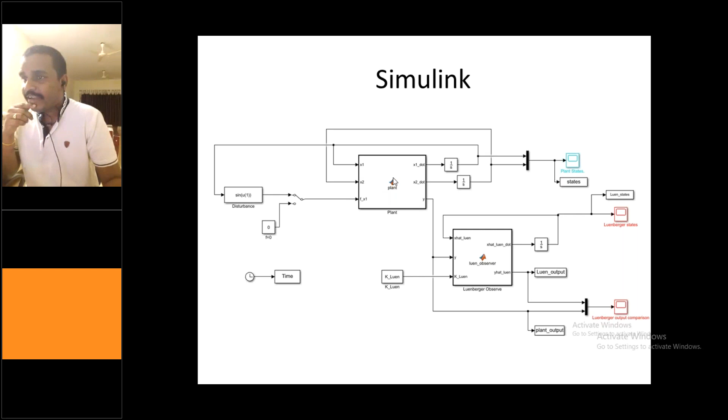So this is the Simulink diagram. You can see that this is the plant, and the plant has two states, phi and phi dot, and these are the derivatives, phi dot and phi double dot. If I integrate them, I'll be getting phi, which is x1, and integrating x2 dot, I'll be getting x2. This has gone inside the plant, and there is this tiny switch here.

As we have seen, if I double click this switch, either 0 will be activated, or this disturbance will get activated, the unknown uncertainty we can say. So here I am going to see my output, how all the states go, and here the y, which is c into x, is going to the observer. You can see here that not all states go into the observer. In this particular case, we have assumed that my output is a combination of the states.

Just for artificially, I assume that it is a combination of states. However, one can always assume that only one of the states, like x1 or x2, is available. So my C matrix either becomes 1 0 or 0 1. If both states are not a linear combination, and if my outputs and states are the same, then my C matrix will be the 2 by 2 identity matrix.

Now, what's going to happen is, with the x dot equations we have seen, if I integrate that, I will be getting x hat dot, which gives me x hat. Along with this Luenberger observer gain, I can see what is happening to the outputs, and similarly I can see what is happening with the estimated states and so on.

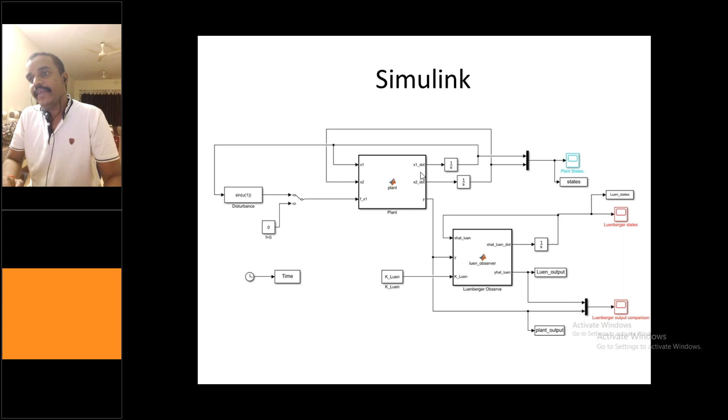So C is this one, and y equal to C into x1, x2. So the output arguments here are x1 dot and x2 dot. Since I'm getting x1 dot and x2 dot, if you integrate these, you will be getting the states, and the output as well is one of the output arguments. So the inputs are x1, x2, and fx1, whereas the outputs of this particular block are x1 dot, x2 dot, and the actual output of the plant, y.

So this is the Luenberger observer structure, this is the Luenberger observer code. For the Luenberger observer, you see x hat dot equal to A into x hat plus B into u plus H into (y minus y hat), and y equal to Cx. So A matrix and C matrix are required here.

Since this u is 0, we are not considering this term, so it becomes 0 because we are not considering the combined state estimation and control problem. Y hat equal to Cx, as we've seen, I have written it like this, and for y hat I have selected C into x_Luen.

So what I'm doing here is x_hat_luen_dot equals A into x_luen. You can see that it depends on how you are selecting this. In this particular case, instead of y minus y hat, what I selected is y hat minus y, so that's why the negative sign is coming into the picture, because I have changed both terms. I kept it this way because while comparing with the Luenberger structure, I want to retain the similar structure of the observer. So this is more or less the same, only thing is this y minus y hat I replaced with y hat minus y, so the plus has become the minus here. So that is the Luenberger observer.

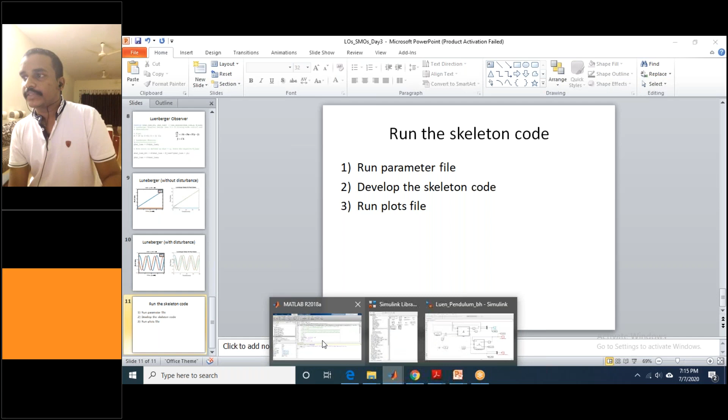I will quickly show you the simulations, how it will look like and what needs to be done. As I told, the first thing is the Luenberger parameters I am going to give you. I'll be giving you this one, so for the Luenberger parameter, you don't have to work on anything. Just if you run it, you will be getting this A value, C value, desired poles. Let me clear all - I have not cleared all. So A, C matrix, desired poles, and this is the Luenberger observer.

The first step is you have to run this one. The second step is I have given you this file, so this is the file which will look like - but inside this plant and Luenberger, it will be the same thing we have seen. You have to copy and paste it. If I run this one, here you can see the switch is there. The first case you run with 0 disturbance, and if I'm running this, hopefully it will run. Yeah, it is running fine. If you write the code inside these two blocks correctly, then that should be fine.

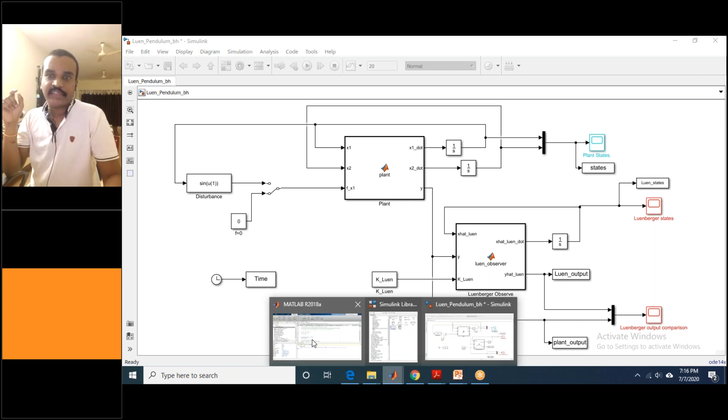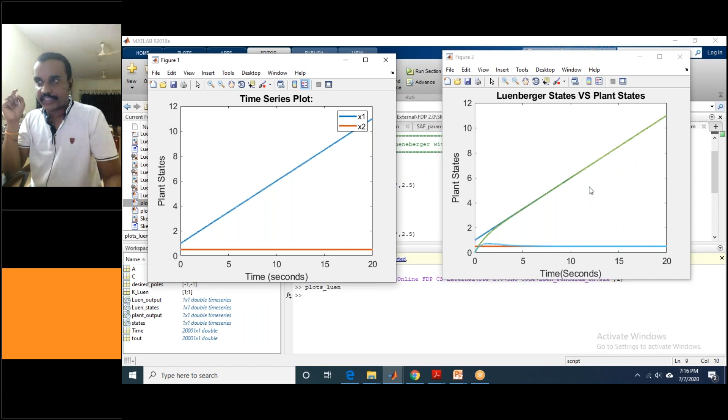And once you run this one, this plot file also I have given. If you run this plot file, you could get the two results - you can see the two graphs. So this is only the states, and this is the states versus observed states. And as we have seen, it is perfectly fine. So in the second case, what you have to do here is see the performance of the Luenberger observer in presence of uncertain terms or faults.

So this is the disturbance. What I'm going to do here is activate it by double clicking this one. Again, I will run this one, and then I will go to the plots. And again, if I run this one, then you can see.

Since my graphics card is not good in this particular personal computer, that's why it is taking much time to see this one.

So the left one, you can see, is only the plant states. And when I overlap the plant states and the Luenberger observer states in presence of disturbances, you can see that

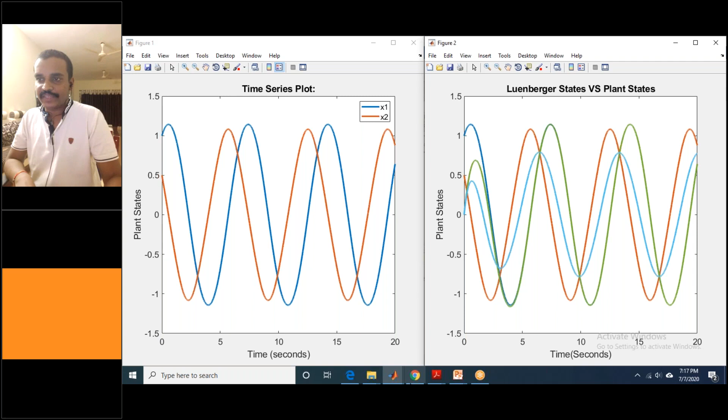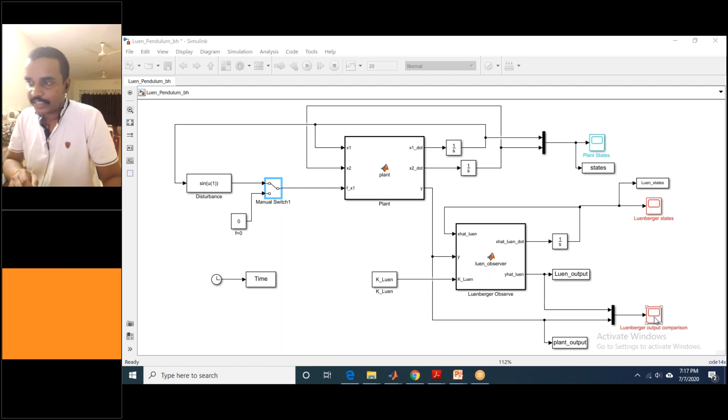it couldn't do the performance very well. I don't know if I have plotted the outputs as well. No, output I have removed. The output you can see from here. This is the Luenberger output comparison, the plant output and the observer output.

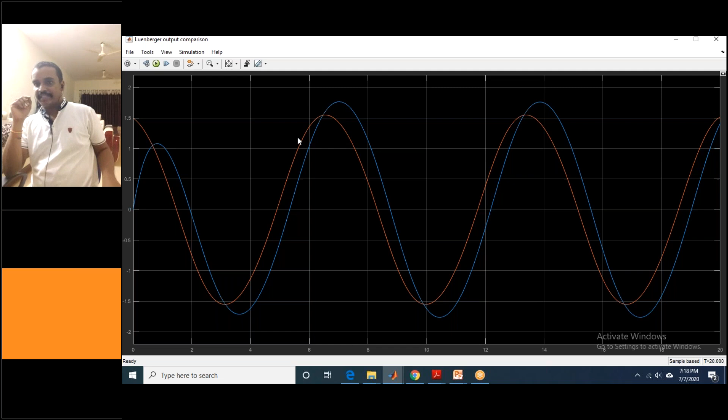You can see that the plant output and the observer output are not the same. Just to inform you, there is only one output, y equal to c into x, where c is the linear combination of the states. So x1 plus x2. You can see that one is the plant and then another one is the estimator, and

they are not at all matching. This I want it to match even in the presence of the uncertainty. So this aspect we will see.

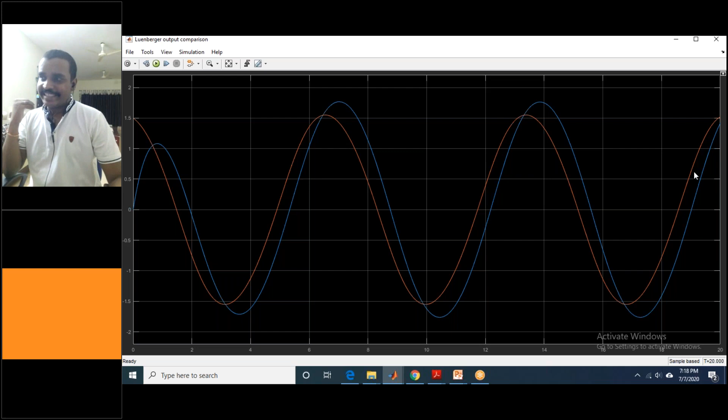So this is the limitation, why one has to go for the sliding mode observer, because in the naive form, this Luenberger observer cannot be able to handle the external disturbance terms. So we will be going to discuss the sliding mode observer next.

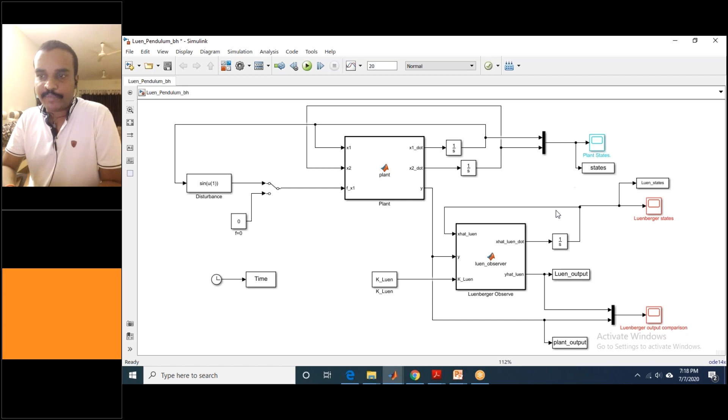I will be sending you the PDF file, the simulation file, the skeleton of this file, and plot file and the parameter file. So you have to follow this particular setup. You have to run the parameter file which is given to you. The only thing is in the skeleton code you have to change the plant as well as the controller, and then run it. Two cases: one without disturbance, the second one with disturbance.

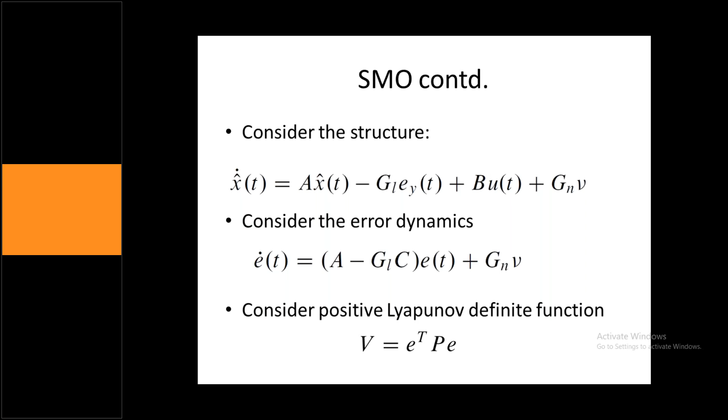So for the sliding mode observer, we should know the bounds. Though here we haven't represented any fault, we can see from the earlier discussion that you can consider this as a disturbance factor, and the bounds of this disturbance should also be known to us, as in the earlier cases.

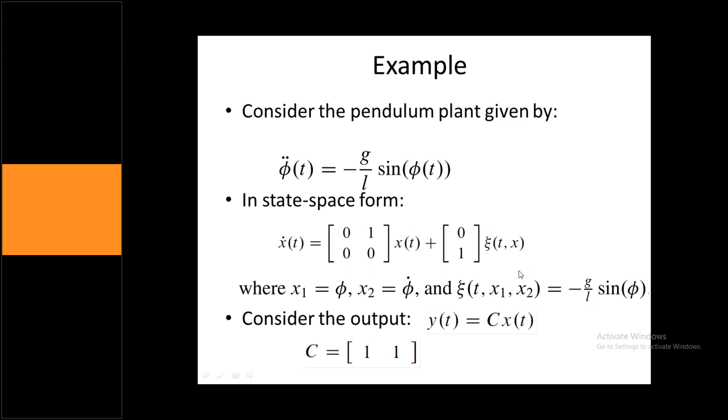So the bounds we have seen in the sliding mode control play a crucial role. So the bound should be the maximum, and the bounded value should be known ahead, a priori.

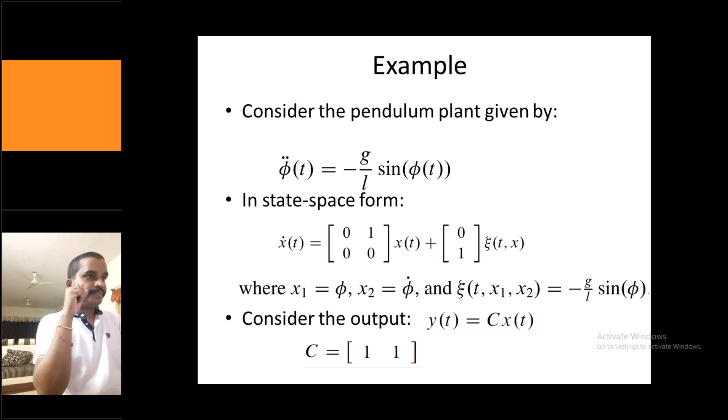So again, I'm coming back. This is the structure of sliding mode control, a sliding mode observer which has been taken, and we have to take the error dynamics.

Error dynamics, again, we have seen x minus x hat is the error, or in this particular case it is x hat minus x. So the error dynamics is x hat dot minus x dot. So x hat dot you can get it from here.

You can see that, whereas the x dot you can get it from the equation we discussed earlier. And if I substitute and rearrange, then it will look like this: A minus GL into C, where this e is x hat minus x.

So it is obvious, so first let me explain what is happening. If you see, this is x hat and the x is coming from there. If I'm subtracting this, x hat minus x, then taking A common, you can represent it in this particular form. This is quite straightforward, and this EY I have written somewhere.

I will show you later what this EY is. EY is the output error, which is nothing but C into x hat minus y. So that is the output error, the error between your observer output and the plant output.

And there is another term, this bu, you will get because we assume that the control is not the problem, not our main concern. However, in this particular case, this bu, because we are considering the error, x hat minus x...

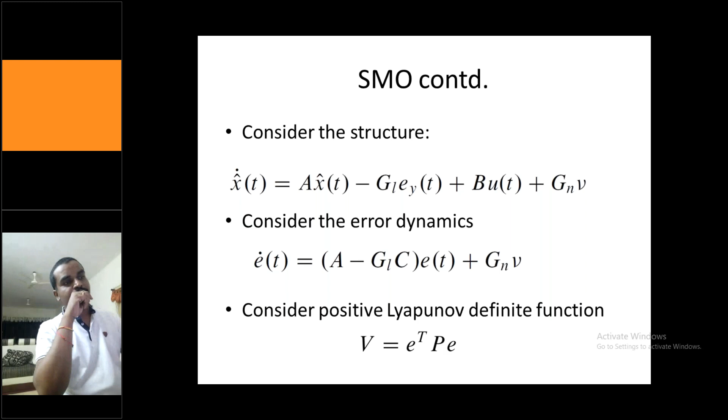If you select P as positive definite, then obviously your V will also be positive definite, because this E transpose E, in the scalar case it will go to square, or if it is a matrix, then the square error terms will come as diagonal elements.

And if you take the first derivative and substitute the error expression from earlier, you can see it is in this particular form we are getting. So now, to ensure that the first derivative is negative definite...

...we have to select P, GL, and GN in a suitable way so that this above expression should be negative. Then we can say that the error in the error system is stable, so the error dynamics is stable.

Question mark: what kind of stability? Is it asymptotically stable, or quadratically stable, or finite time stable, and so on? That needs to be thought of. For a very naive case, we will assume that if this V dot is negative, the error dynamics of my system is stable.

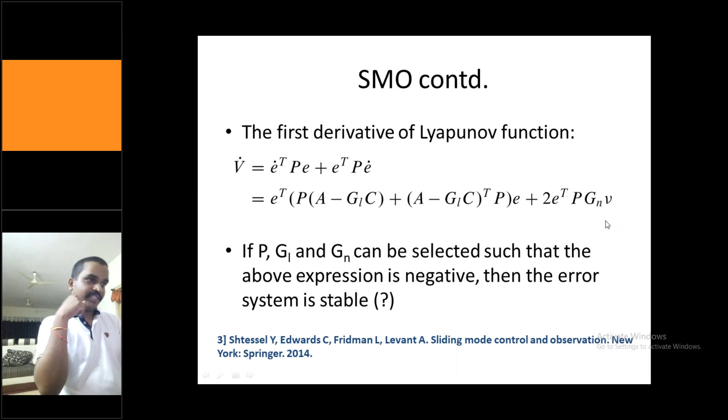So the key thing is, how do I select this one? This A minus GLC you can select from the standard pole placement, what we have seen earlier. However, the selection of GN and v is the critical one which needs to be thought of.

So now we will design the sliding mode controller, sliding mode observer for our plant. You can see that this is the structure, the same structure.

What we have seen, this error, you can see that this is C into x hat minus y. So that's what we have seen. The linear part is GL. It can be selected from pole placement, and we'll keep it the same.

The same pole placement design what we have selected, the desired poles are -1, -1. It is not +1, sorry, there is a typo here. So again, we will select the same desired poles -1 and -1, and we will see whether it is able to deal with the plant or not.

This is the Luenberger gains, the same. We will be selecting 1, 1. And the non-linear part, we have selected something like this. How they have selected, this is the problem of our interest. This we will discuss maybe tomorrow. I just give you a brief introduction about the selection of this one.

So if you see overall this one, this sliding mode observer is kind of a retrofitted model. One can retrofit in the Luenberger observer model. You can always assume that in the absence of disturbance, you just activate the linear part, which will do the task very well. As soon as you see the disturbance or there is a mismatch from the nominal plant in the actual plant, then you should activate the non-linear term to handle that. That is the basic philosophy of the sliding mode observer.

In the nominal case, if you make this GN as 0, or the nonlinear term as 0, this particular sliding mode observer will boil down to the Luenberger observer, and it will work. It will be the same in the absence of disturbance, both will be the same. We will see that as well. And if there is a disturbance, this needs to be activated.

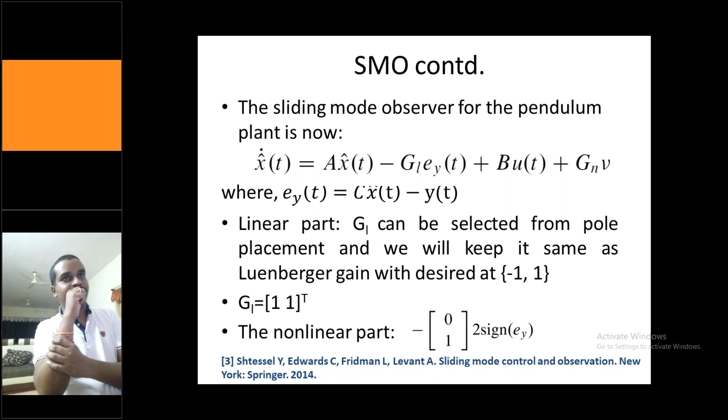So this sliding mode, this nonlinear part can be activated for real systems. It is something like that only. Because this nonlinear, always you don't want this nonlinear or chattering for your system to see. So as soon as your system sees some mismatch between the nominal and the actual plant, then you should activate this nonlinear term for the error convergence. Otherwise, if you assume that your nominal plant and the actual plant are not that much different, then you can only go with the linear gain GL part.

GN part you can assume is 0. So that is called a retrofitted model. You can retrofit any kind of linear model along with this sliding mode observer. So here we have considered the same pole placement or the Luenberger observer as the linear part, and the non-linear part is coming from the sliding mode things.

So this is the Simulink diagram which you can see here. The plant is the same what you have seen here. The only difference is, if you see the input, the first few inputs are very much similar, like Luenberger, X Luenberger, Y and K Leuen. But the new terms, as far as this particular sliding mode observer is concerned, GL is the linear term which is coming. In fact, this GL and K Leuen is the same, which I will show you.

Just I kept it in case if you want to use a different linear observer here. And this GN is the non-linear term and this rho. Actually it is 2, so which I have hard coded here inside the code. But if you want to see the response of the system for various rho, you can see from here.

And the output, you can see here that x hat Luenberger output, if you do after the integration, the Luenberger observer states will get similarly for the state sliding mode observer. So this is the output, what we are seeing for the Luenberger output and the sliding mode output as well. And this is the same plant code.

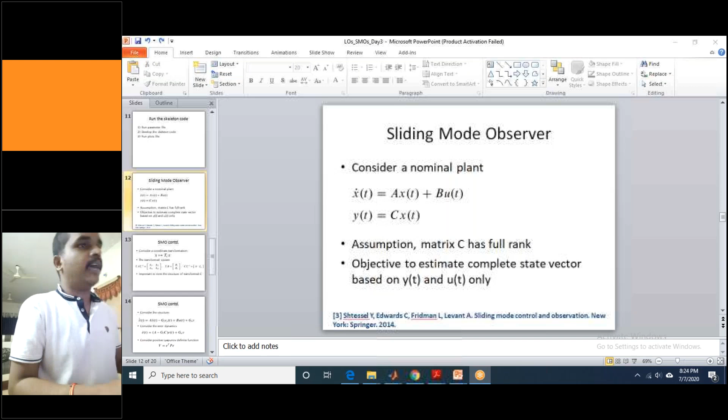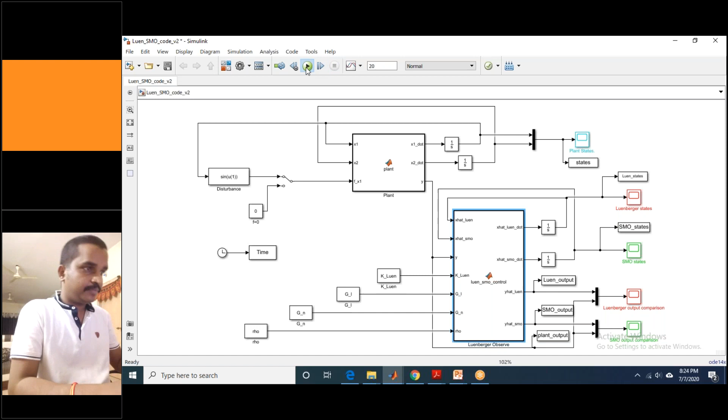So this is the plant, which is the same thing we have seen, and this is the observer, what we have just discussed. Now what I'm going to do here is I will activate this one, and I will run this, and then I will run this parameter code as well, sorry, the plots of this one. So this will give us...

You can see that the property which was missing in the Luenberger observer, you can see it is perfect tracking. Initially it is taking some time, and then perfect tracking is happening. So both the states of the plant as well as the SMO states, you can see the tracking is perfect.

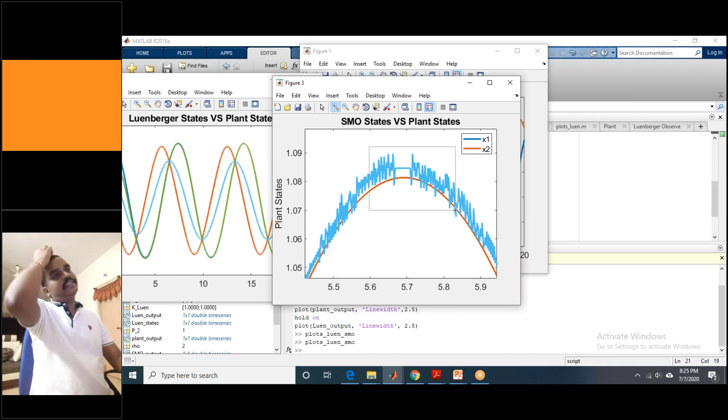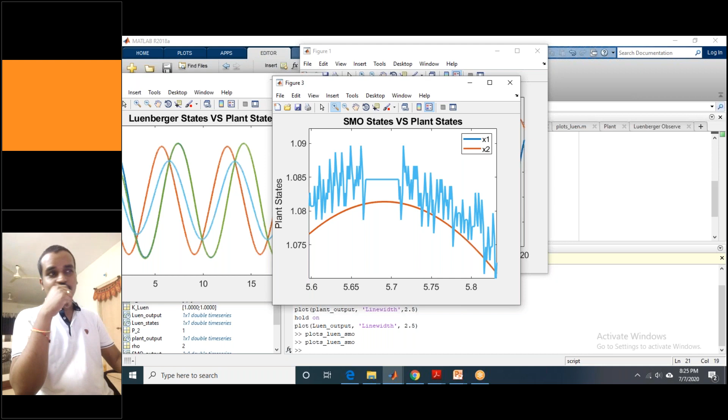And if I zoom here, you can see that there is a slight chattering happening. This is the issue with the sliding mode observer, like the sliding mode controller as well. However, this chattering can always be reduced by using various mechanisms. Tomorrow I will tell you one small change in the sigmoid function, then this chattering will go off with a little bit of sacrifice in this.

And if I zoom this one, I think one of the states is getting converged here.

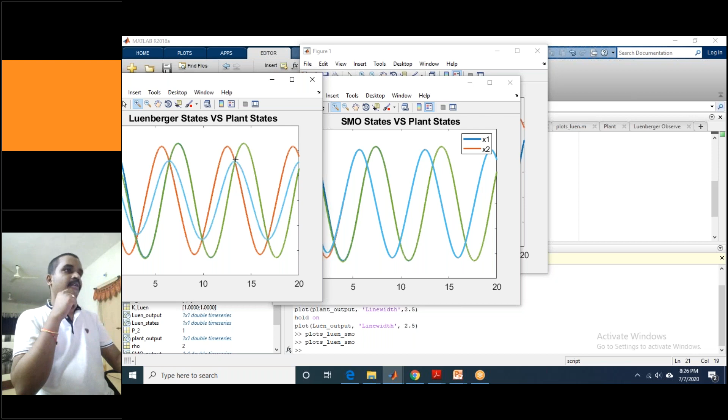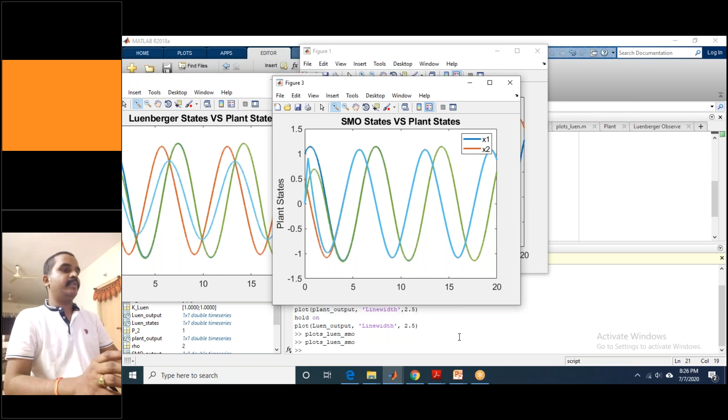It is fine, so it is happening fine. But the problem here is you cannot see this convergence is not happening. In the sliding mode, you can see the convergence very beautifully, even in the presence of disturbance. The only thing is you should know the maximum value of the disturbance, the bound of the disturbance. So that's what I can say from this particular lecture.

I will give you this skeleton, not now. I will give it to you after my talk, because I have another 15 minutes to discuss the paper. After today's session, you can do it at your home, or tomorrow the whole day you can reproduce the results in this one.

So now what? My voice is not audible. Is it audible or not? Can anyone respond? Sudhakar is saying that my voice is not audible. Yes, yes, audible, okay. It is audible, okay, it is good, sir. Audible, audible, sir. Thank you.

So this is what I can tell you about the sliding mode observer. Now I will show you a small recent paper, a 2020 paper, and I will tell you how to reproduce the results from the paper by using the sliding mode observer concept. What I mean is that the sliding mode observer I have explained for an hour is not the complete sliding mode observer description. I have just given you some flavor of the sliding mode observer. If you want

single input multi output, somebody has written on the side. So if you want more details on the sliding mode observer, you can refer a textbook.

So that is what actually I want. Quickly you can design any sliding mode observer for any system by the concept we discussed. If you want to dig much into various properties, invariant property, manifolds, how to select the sliding surfaces, and how to reduce the chattering, these are all beyond the scope of this particular FDP, because in a couple of hours I cannot cover the complete things.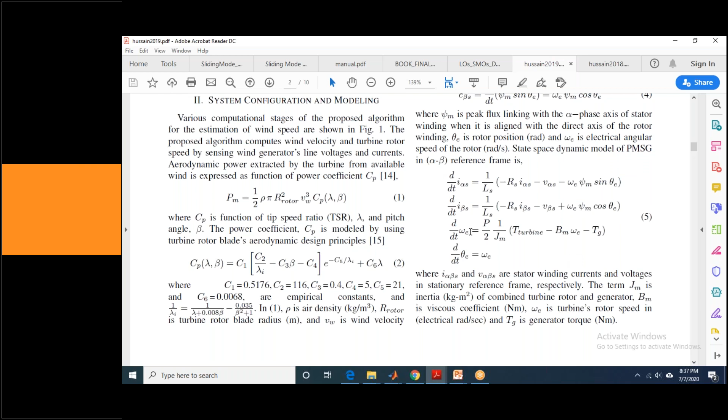And these terms, what they have done here, I will show you—so keep in mind only these two equations, I'll show you what they have done. They have represented it in this particular format.

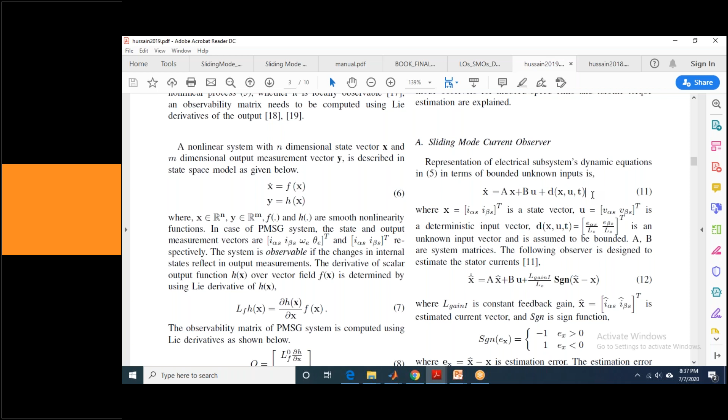It is equation number 11. You can see that they have tried to represent this in the linear form, x dot equal to ax plus bu, but there are other terms which are not directly dependent on the state, or which are unknown. They have kept those as a disturbance. So that nonlinear or uncertain system can be represented something like this.

So I alpha and I beta are the two states, and V alpha and V beta are the control inputs. So x dot equal to ax plus bu, you can write it. But the remaining terms, E alpha s and E beta s, they assumed as an uncertain input, a bounded uncertainty.

So like what we learned in yesterday's and today's class regarding uncertain terms—the bounds of this uncertain term should be known to us. Okay, so again I'm going back here.

So these two equations now can be written as x dot equal to ax plus bu in a very standard form, where these v terms are the inputs, and the A matrix looks like minus rs, 0, 0, minus rs. These two terms they consider as an uncertainty, or rather disturbance.

So now their aim is to estimate the states—now, for the current observer, they have to estimate the states, assuming that at the same time they have to reject this disturbance as well. So this is the observer what they have selected.

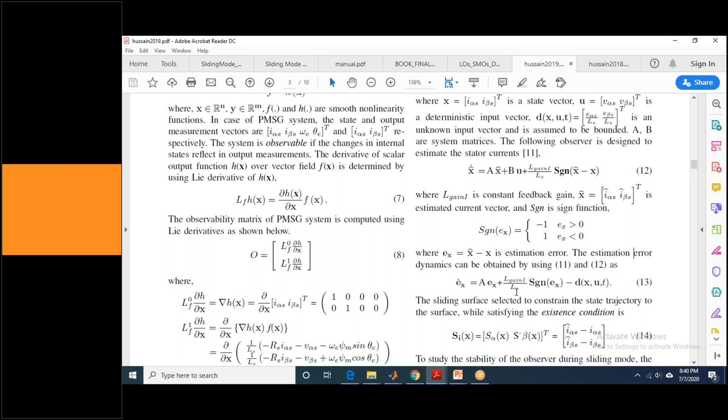This tells about the sliding mode observer, and further analysis of why if you selected this particular thing, whether it is stable or unstable, how you selected this one - the proof is given here. They have taken the estimated error, taken its derivative, used a similar Lyapunov function approach in the first derivative, and ensured they came up with this value, L gain I.

So L gain I should be the maximum, since we know the bounds of these uncertain values. It should be greater than the maximum value to ensure good stability.

So this is one thing, and the next thing they have done here is estimation of induced speed EMFs. They have done the speed EMF estimation as well, you can see from this. The next thing they have done is turbine torque calculation using a sliding mode speed observer.

So another speed observer they have used here - you can see d by dt of omega e hat. Omega e as well as tg they have estimated here. Omega e is also estimated here, and this is the equation showing how.

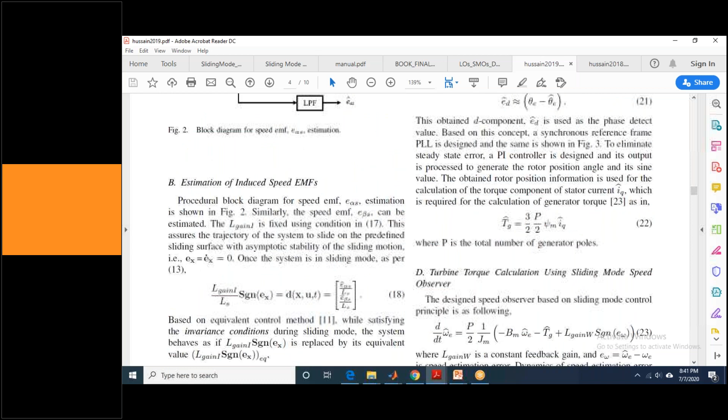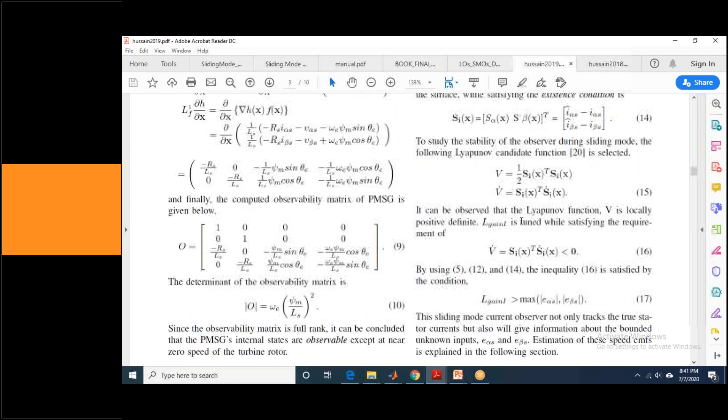If you see our system broadly, we have estimated using I alpha and I beta through the current estimators, and this omega e - we have estimated omega e using this particular equation. The other equation is the derivative of this one, so you can do it very easily.

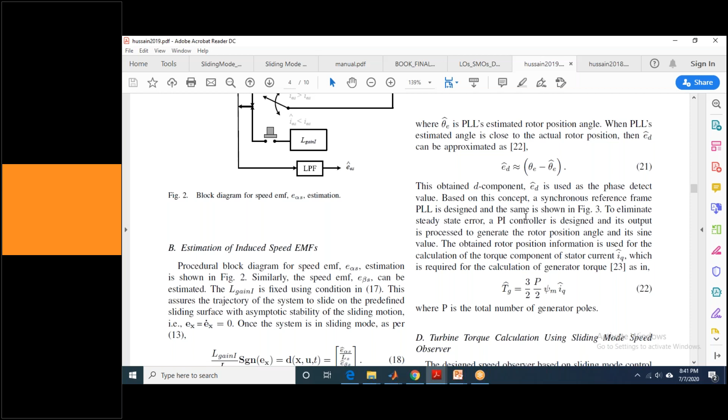And there are standard formulas for wind velocity they have used to calculate the turbine torque and other things.

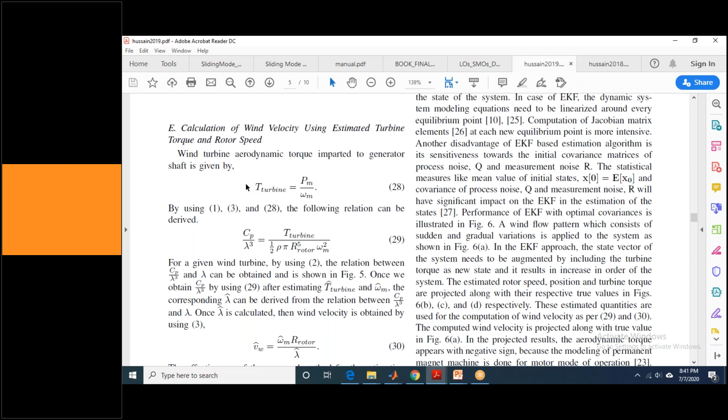In the simulation, what they have done here is compared this with EKF based estimation - the extended Kalman filter - and these are the different various results.

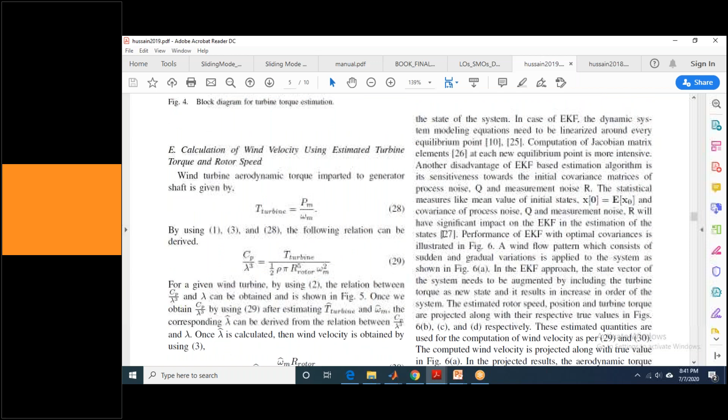And they have done the prototype as well. Here you can see all the parameters, most of the parameters - this L gain 1, what you want for the controller design, is given here. So you can easily reproduce the results. You should focus on this particular plant.

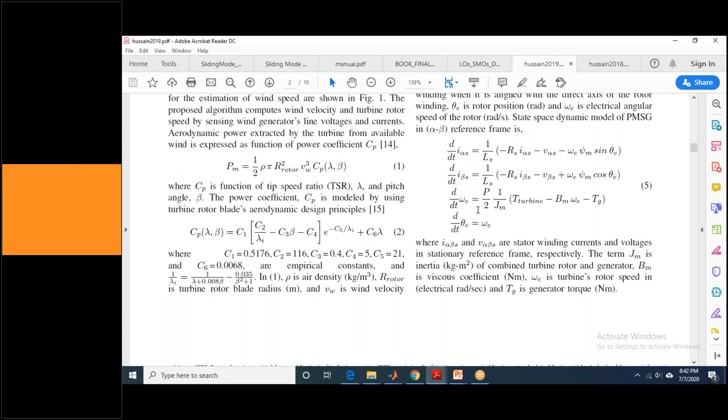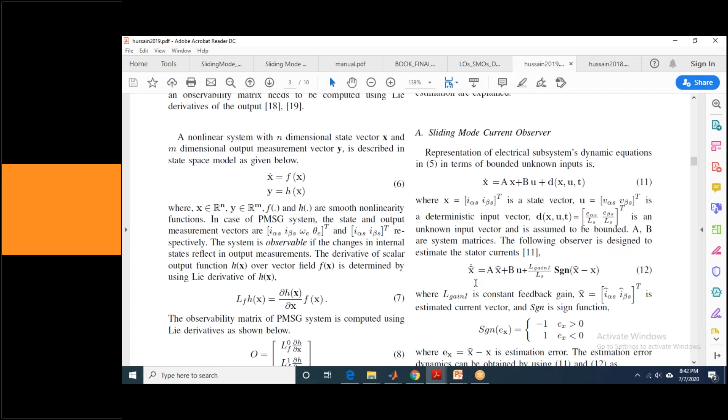As a first step, you assume that V alpha and V beta are constant, assuming this is not the control problem. If you take some reasonably well-valued open loop control, assume V alpha and V beta as some kind of sinusoid or good open loop voltages, and use these current observers - 4 states total. The complete X hat dot is a combination of the two currents - you can see the two current observers, one speed and one theta observer.

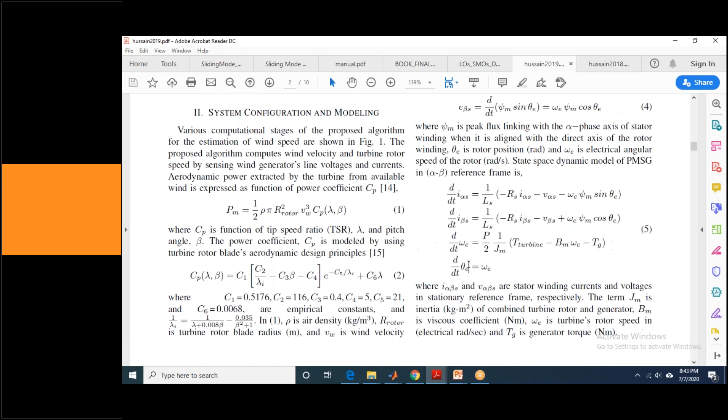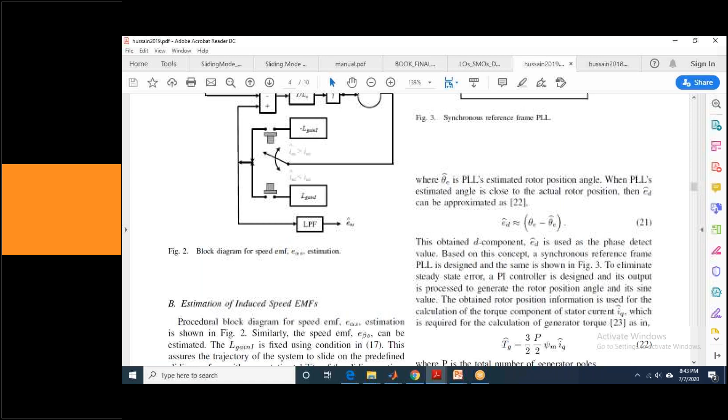So using these equations for the two currents observed, you have to find the first two states' estimation, and they have done the torque estimation as well. The estimated torque can be used for control purposes, and omega estimation by using this particular omega e speed.

This completes my today's session.